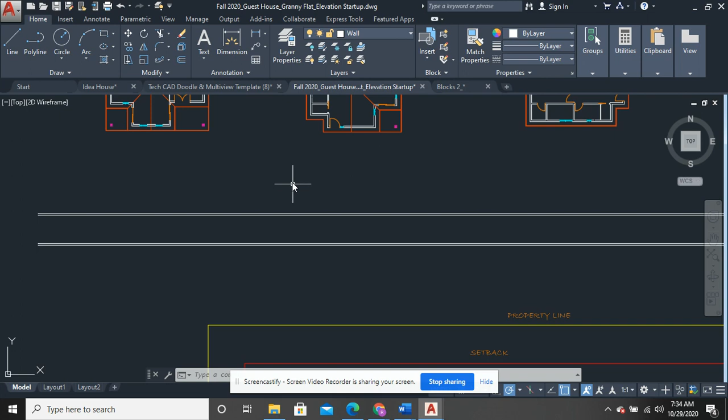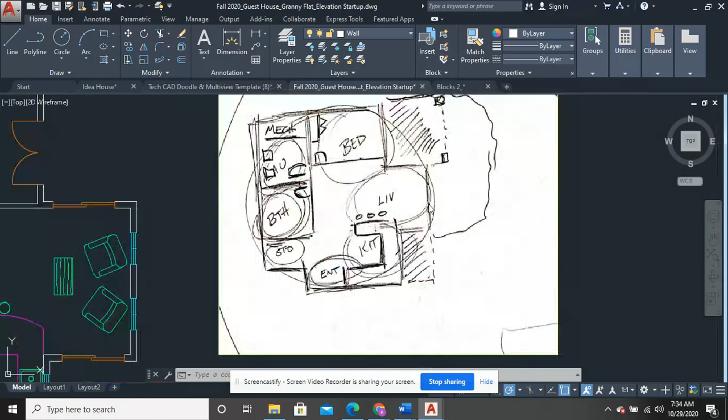All right, so now it is time for, I think, my favorite part of architecture. I guess my tie for two is down here in the real concept sketching and making it come alive. I really do like getting a floor plan going, and then I kind of beat my head against the wall when my best laid plans don't work or I need to change something. Then I get up here, and this is really the most fun part because you get to see the house come alive.

So anyhow, I always start this and I just go to a construction layer, and this is going to be a bunch of line drawing. I'm just going to deal with one of these. I could pop vertical lines in all the way across this thing, but I'm just going to deal with one here, and then I'll do possibly another one just to reinforce it, or come back and do one later.

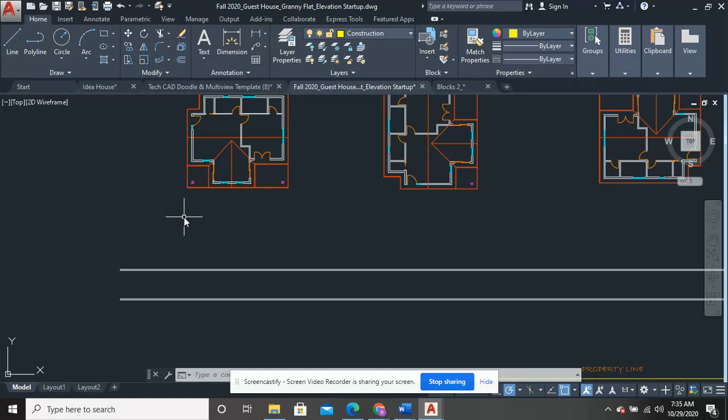To go over what I did in the last video, I drew this line, we called it the ground. I offset it 6 inches, which shows the concrete thickness. I decided I wanted a 9 foot first floor in my house, so I offset from the top of the concrete 9 feet, which gets me to here. Then this is a board, a 2x6 piece of lumber because it's a single story house. So this is what the ceiling attaches to, and this is the top of that board, so that's another 6 inch offset.

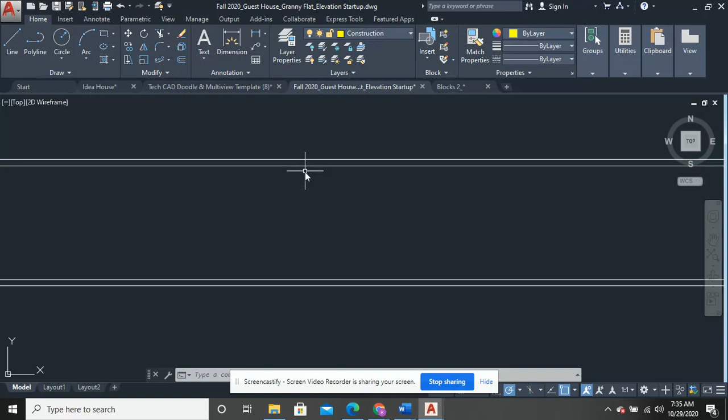So this is what's awesome about this method of projection. I'll deal with all these lines sticking out into space later, and you might be horrified here to see what happens in a little bit.

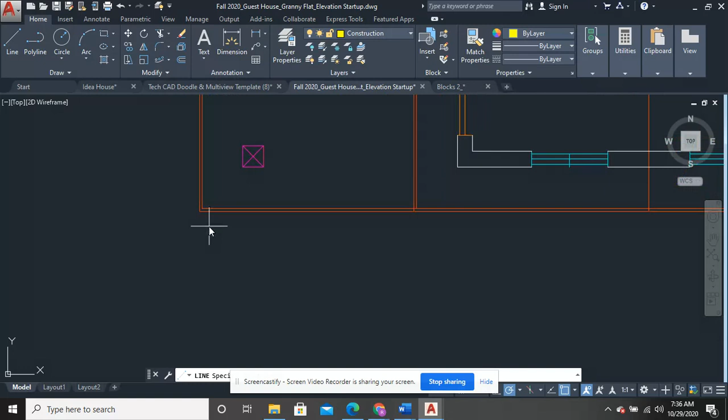So I'm going to come here and grab a line, stick it on the furthest thing out on the left side of the home, which is the corner of that fascia board. I'm going to bring it perfectly straight down, parallel to the y-axis, and I don't care about trying to meet it up with the floor or anything. That's why I have the trim tool, which can simplify things for me later.

So I'm going to go ahead and copy this. Now this is like a yes or no test. I'm going to cruise along my house from the left side to the right side, and ask myself, would I see it? If I'm standing in front of it, will I see this column? Yes, I will. Will I see this window? Yes, I will. Will I see this sliding door? No, I won't, that's on an adjacent face. So when I copy this, yes, I'm going to see the thickness of the soffit for sure.

This column lines up perfectly with this corner, right? I can check that, so yes, I see the corner of the house or the corner of the column. I'm going to come over here. Do I see the left side of the window? Yes, I do. Do I see the right side of the window? I sure do. Okay, did I miss anything?

Yep, I sure did, because this is where this bumps out. This is the left corner of that bump out, and this is the corner of that fascia board. What else do I see? I see the left corner of this bumped out section of the structure, the left side of this window, the right side of the window, the left side of the window and the right.

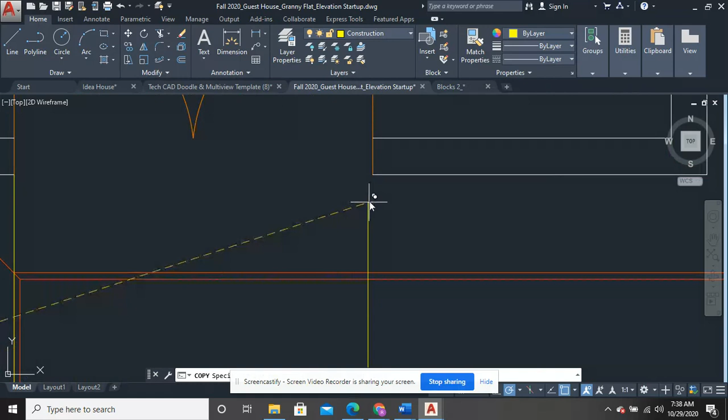But I sure do see that door. That's interesting because that looks like it lines up perfectly, so I'm going to have a line on top of a line. And I see the right side of that door, and the right corner of the house, and again that lines up perfectly with this column, so I can use that. And I see the end of the soffit or the fascia board on that far right side.

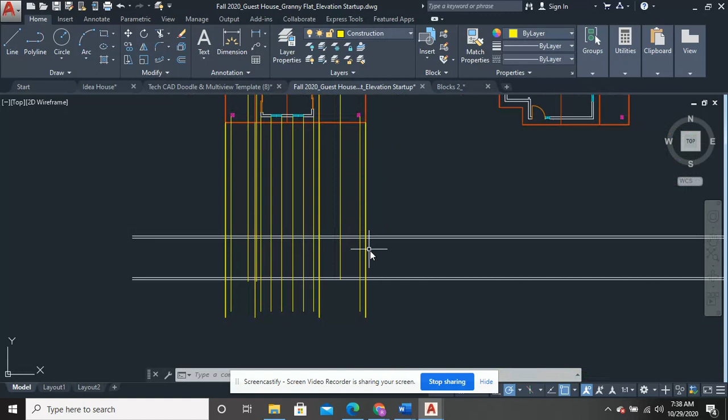And what you're going to see is you just made yourself the tic-tac-toe board from hell right here, okay? What a nightmare, right? So one thing I'll do here is move this up a little closer, and the next thing I'm going to do is simplify life for myself. I know that I don't have anything here that punches through the concrete at all, okay?

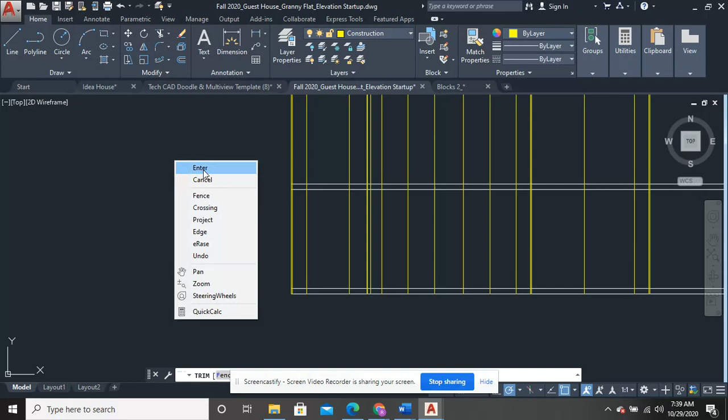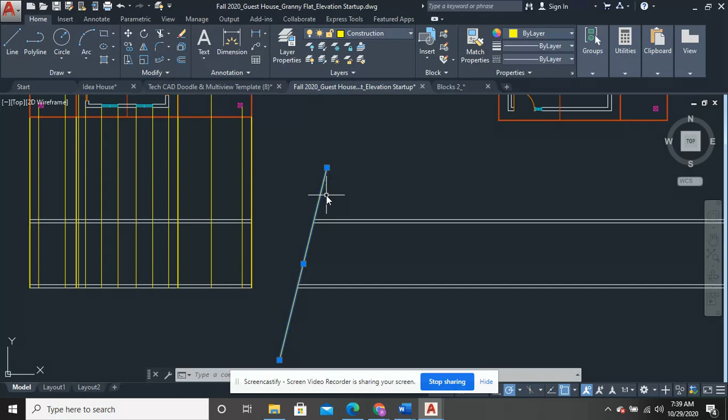Nothing vertically in the house, no windows or doors or anything else. The furthest point to the left of the house is this soffit, so I have nothing that punches through out here. I don't have any trimming lines out here, so if I trimmed this off, it's going to get rid of the whole thing to the right. I'll just grab a line right here at random and trim these pieces, and leave that alone, or leave it in place right there. So the right edge of the house, furthest thing to the right, left edge of the house, furthest thing to the left.

Let's smarten up a little bit, see if we can make more sense out of this. So we're going to color code it. I'm going to match properties, and there's a couple ways to do that. I want to say this is the same as this - this is soffit. So I select it, and I can come down and hit soffit, which I'm counting as my roof right now.

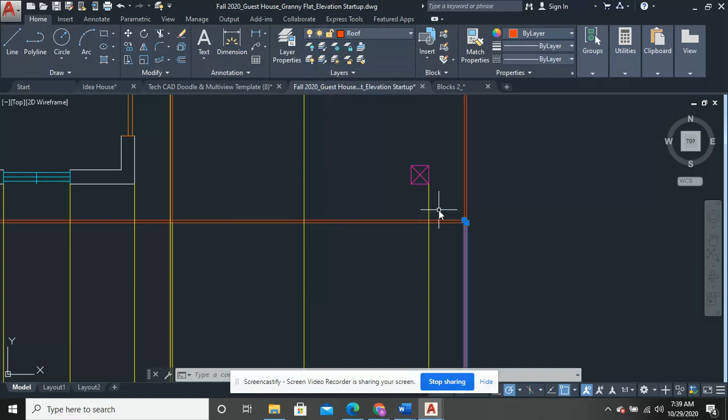The easier thing to do is use your match properties tool. In AutoCAD 2018 and previous versions, you have a tab with the color wheel and two icons, and a drop down where match properties is. You click match properties, and say, okay, this is a door, so I want to use this as my source. You get a paintbrush, and I click this and this, and those are now doors. I don't have any other doors in the front of this house that I can see, so I'm good.

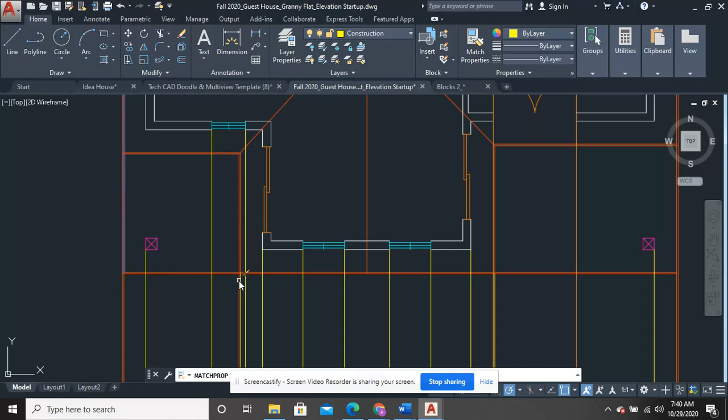I use match properties again. This is soffit, so I'm going to match both of those - these are soffit. What about these over here? That is also soffit, and this is where I got a little bit messed up because it's soffit and my door happens to be right on that same exact portion. That's not going to matter, we can come back to that. I'll probably forget something about that.

So this is wall. Yes, it's a column, but it aligns with my wall. There's a wall corner right there. Going across, there's a wall corner. Going across, that would also be a wall corner, right?

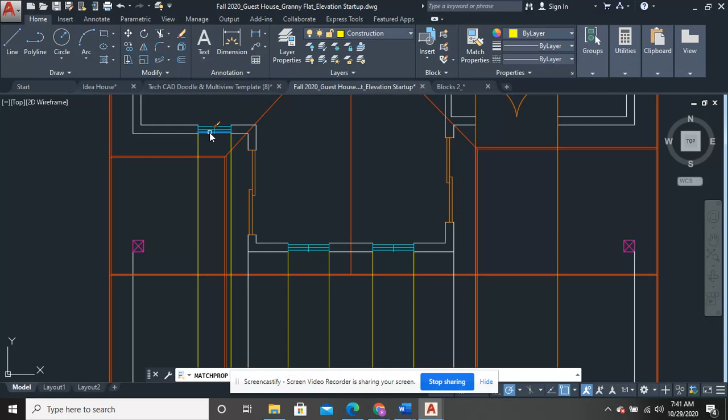I'm going to repeat match properties one more time and identify my windows. So here's a window, here's a window, here's a window, there's windows, those are windows, and I have no other windows on here. So I should have no yellow lines because I used the construction line to get everywhere, and this should tell me that I've identified every single thing in the structure.

I leave as many of these vertical lines shooting up into space as I can for a little bit, because if I forget or make a mistake down here, I can look and follow the line and say, what was the source? The source was the window, the right edge. I'm going to also put these on my roof layer because they are a part of the roof system.

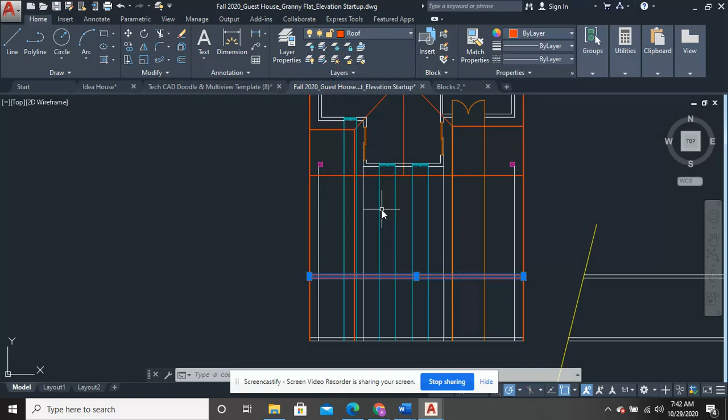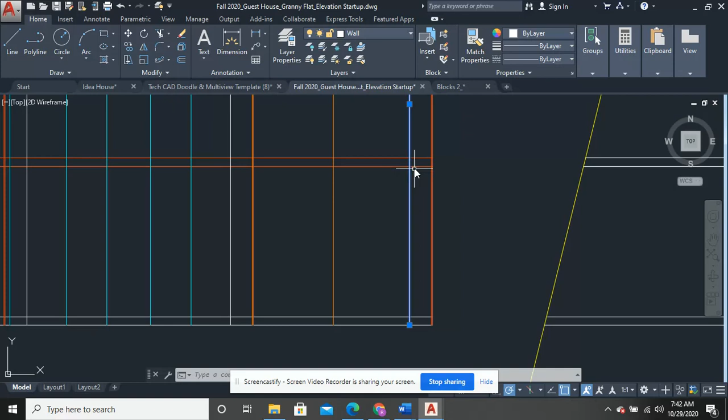Now when I look at this, I say, okay, what is this space? From the corner of the wall out to this red line, this is soffit, right? Which means the wall is the furthest thing to the right, but the soffit doesn't start until I get way up high above the fascia board. So I think the easiest thing to do is wipe out this. Here's the corner of the wall or the edge of the wall, and here's the overhang. What I can do very simply is just trim this out, get rid of the overhang. So now I have a wall corner, and you can see I have an overhang.

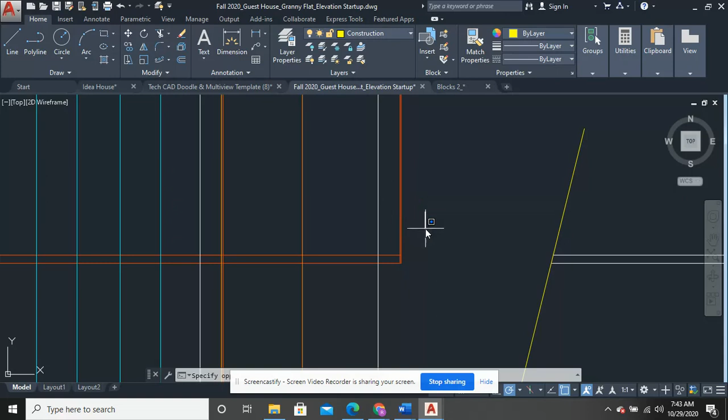I can, at that point, erase these, but if I erase them, it's going to take the whole thing away. So I'll just trim them. And I can do the same thing on this side. This is the corner of the wall - the soffit or the roof doesn't come down past the wall, so this right here is a goner.

And that should start to simplify the house a little bit from the front. Okay, I have these two little things to get rid of that were on the floor.

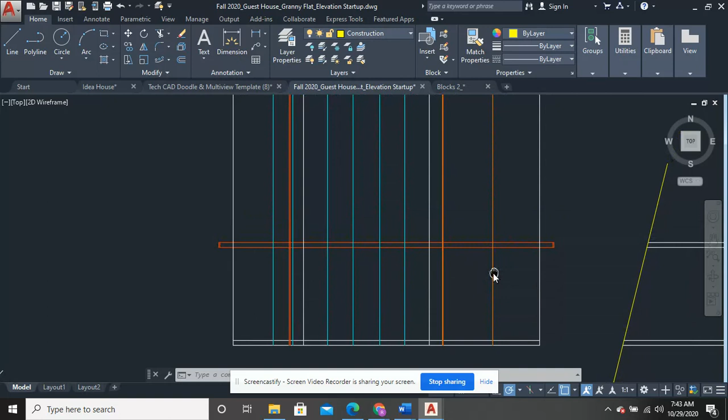Let's go back a little bit. In this case, I have more soffits to deal with. Following along from up here, this was soffit as well. The soffit doesn't stick down past the wall, so I'm going to trim both of these.

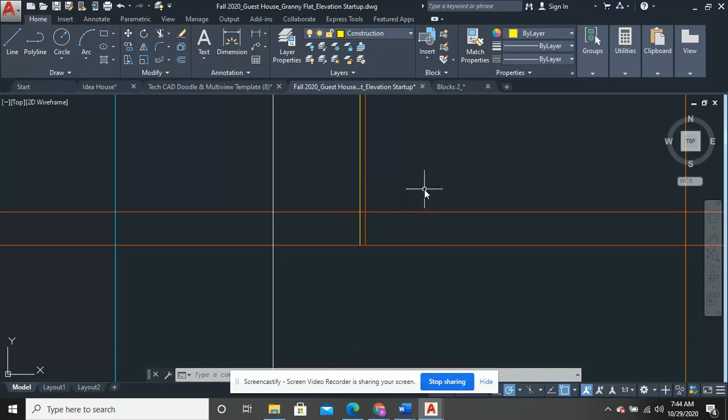Remember, there is a soffit underneath there. That's the one where the lines were on top of each other, so I'm going to leave that alone. Yes, this soffit comes all the way across. I'm going to come back to this one, and trim this soffit right here.

Hopefully it's starting to look like a little bit more sense. Here's the wall corner, I come over, there's the soffit, that goes away, and that goes away. It still looks pretty spider webby, but I can neaten things up one more time.

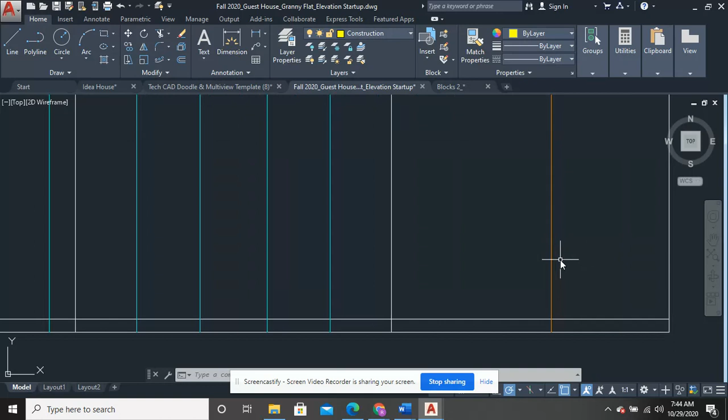I can come down here because nothing sticks into the concrete. But this wall actually is defined, so those windows and doors don't stick down into the concrete. So I'm good right there.

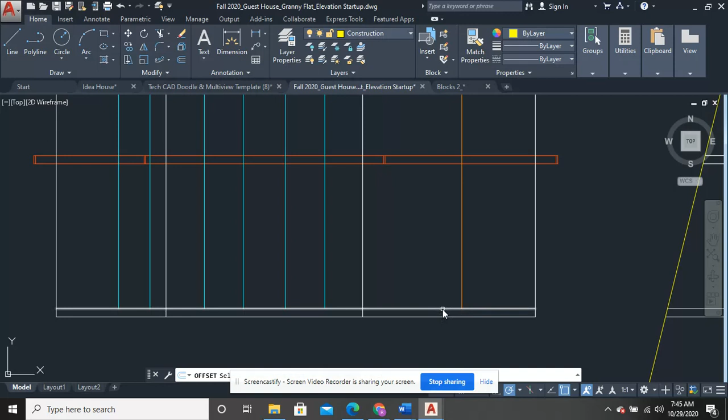Now the thing to do is talk about doors and windows. A standard door is 6 foot 8 inches high, which is 80 inches, and we typically align windows at the same height as the tops of doors. So in this case, I'm just going to use one standard offset, 80 inches from the floor. In framing it would actually be a little more because you'd leave a little wiggle room for the door, but in this case it's fine. My dimensions would reflect that in the end of the drawing.

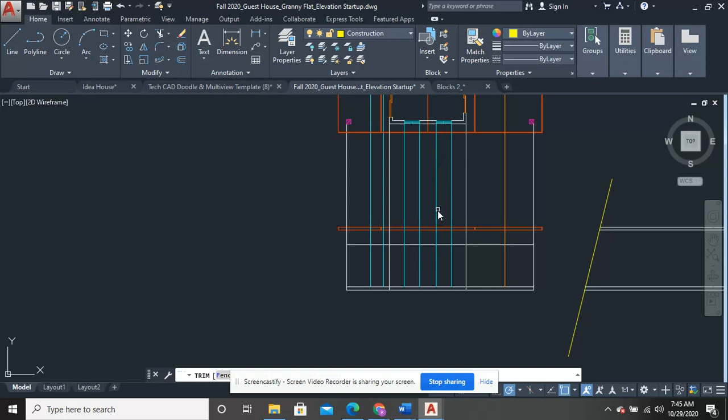Now let's look at this - this is a really easy one to trim. So again, what do I have? Between this blue line and this blue line, I have a window. I know that these two lines, if this is the top of the window, nothing sticks up above that window. And this is also a window right here, so nothing sticks up above that window.

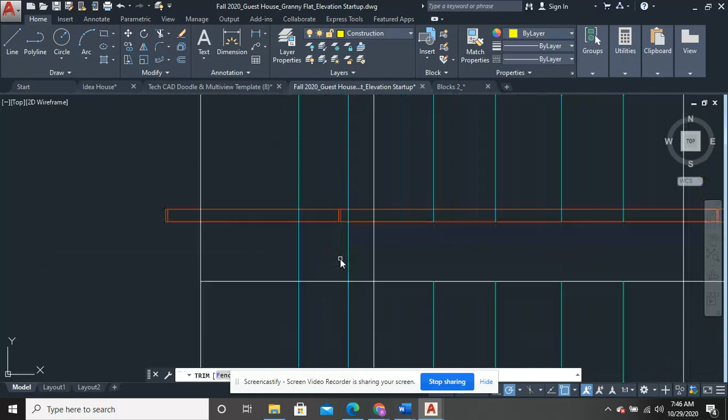I'm going to come down to my last window, which is right here. Between these two blue lines, I have a window again. So that's simplified things a little bit.

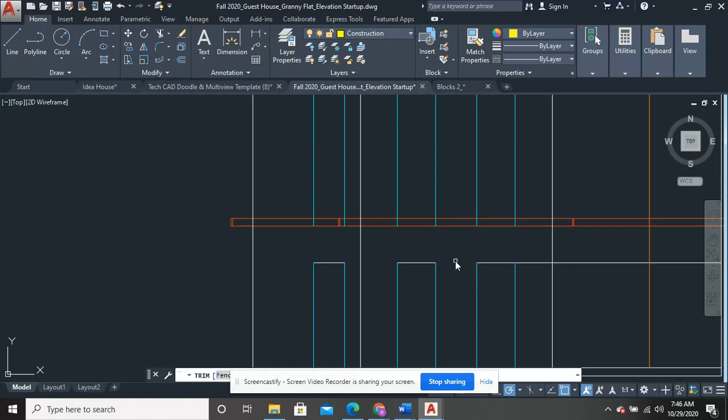Over here, I don't have anything. So this is really the top of the window, and that means that can go away and that can go away. Between these two blue lines is a window, so that goes away. This is the space between the windows, so that goes away.

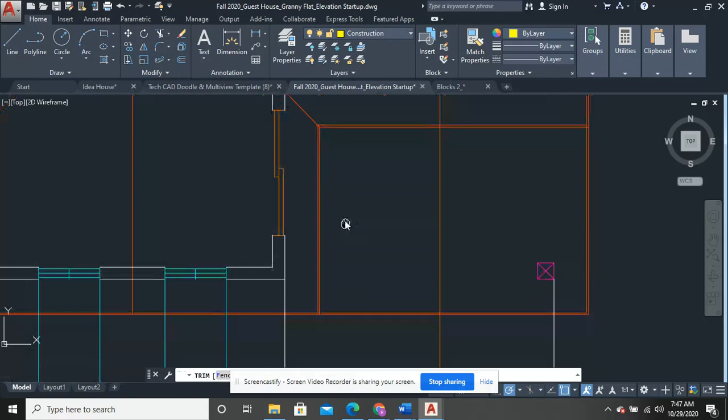And then if I go over here, what was this one orange line? This was the space between my doors, so I should have another orange line directly under here because that lined up with my soffit. In this case, I can come down here, got nothing above there. So what I'm going to do here is just draw a line again to identify the corner of my door.

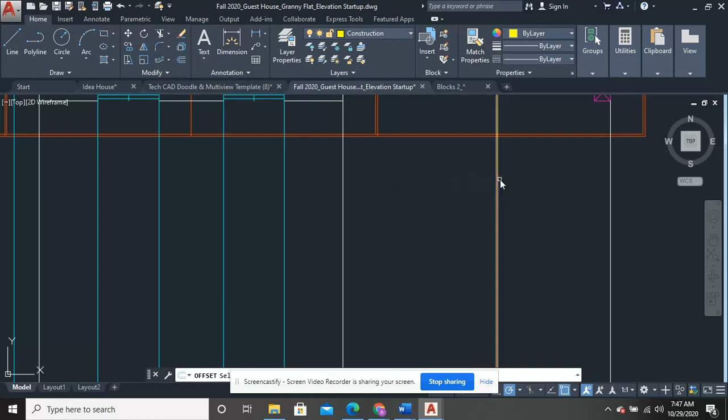You know what, I do want to offset this because I think that was a 60-inch door - yep, this is the one I'm shooting for. So now I can go ahead and delete that, and that door, there's nothing that sticks up above it. Now this can go away as well.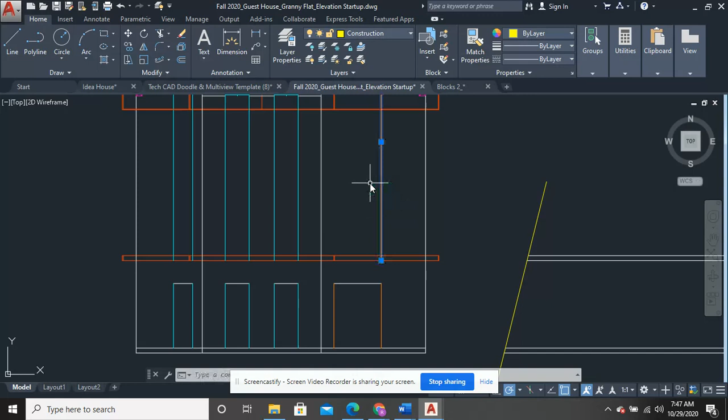So I've identified everything, I don't need that anymore. I can see that this is the right side of my door. I can see that these windows are now defined, I can leave them alone. I can see that these windows are now defined.

They can go away. Hopefully you can see that you have this as the bumped out section of your house, which is right here. This is pushed back, which is right here. And this area is pushed back, which is right here.

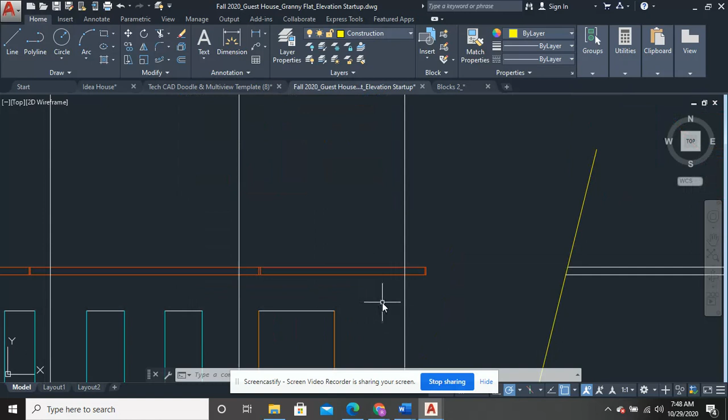Again, I don't need anything, right? Nothing sticks up - the wall does not stick up above the soffit or the fascia board. So I can do those trims right there and get these out of the way. Gone.

I can come down here and go ahead and match properties, and I'm going to go ahead and get that. So I've defined my door. I'm going to match properties again, and define these. And we're good to go.

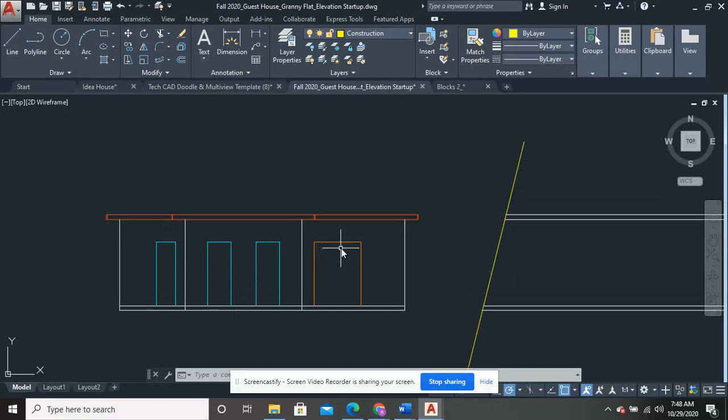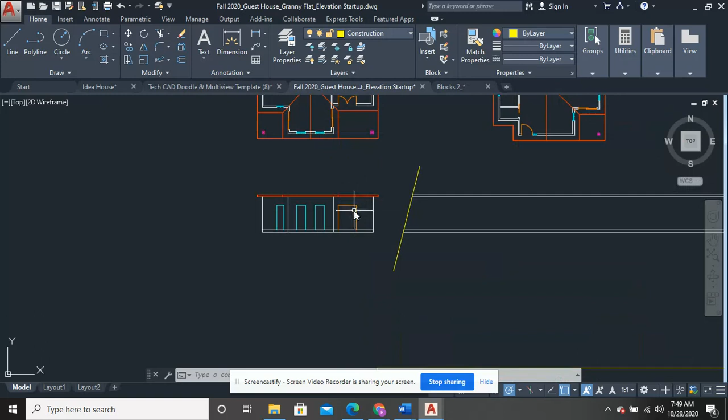So this has been everything that we need to do, with the exception of putting in window heights. I'll come back to that on a third video, or I guess it might be a fourth now. I don't think I'm going to do a video for each one of these offset elevations unless I see something that is fundamentally different. So I'll leave this here, and I'll come back, and then I'm going to skip on to roofs because we do the same thing with the method of projection.

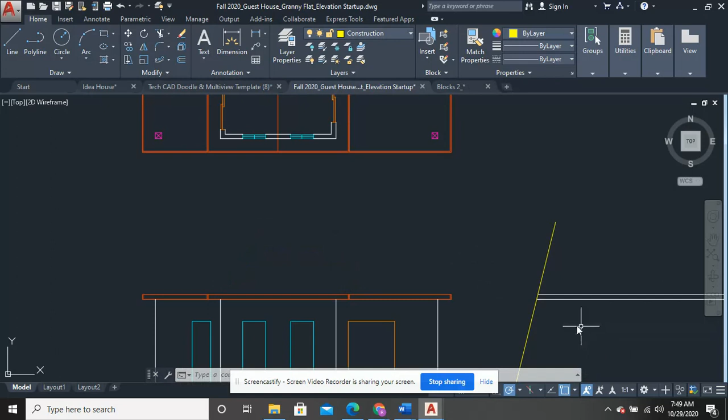The center point of this roof, which is off because it's using this entire line as the midpoint, is right here. I'm going to need to know that because I'm going to have a roof that comes down like this over this portion. So that will be it. I'll go ahead and make the rest of these projections and then come back to this one right here.